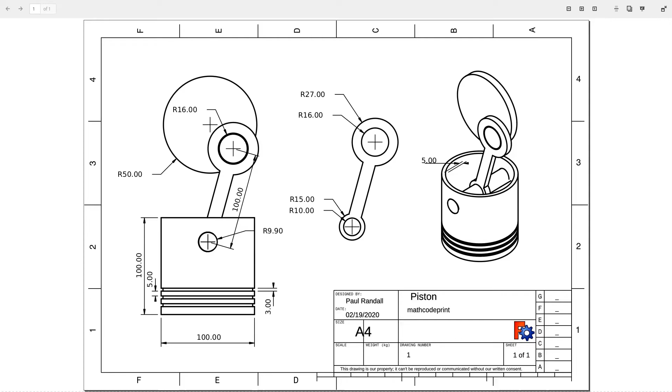And look at that. So to start, we'll do the piston, and I'll just do a body, and we'll use our additive cylinder. So our radius is going to be 50 millimeters, and one thing I like is to bring that right in the center and go to the corner like that.

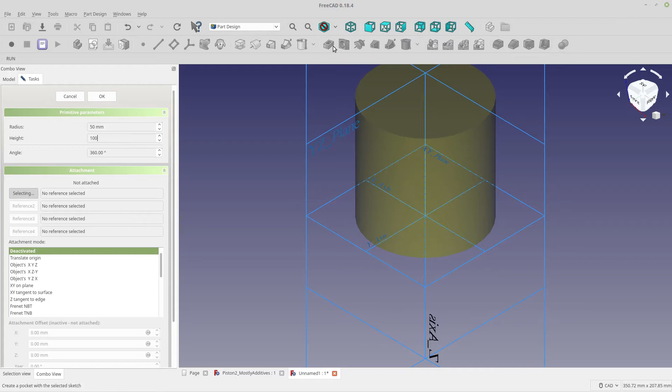So you can use this, or you can click right there. And let's make the height 100 millimeters. Get that back in, zoomed the way I like it. And we'll just leave that not attached because that's just going to be sitting out there.

And to hollow out the center, I'm going to select that top face, and we're going to make a thickness out of a solid, or a thick solid, or whatever it is. And we don't want it to be going outward because that would add thickness.

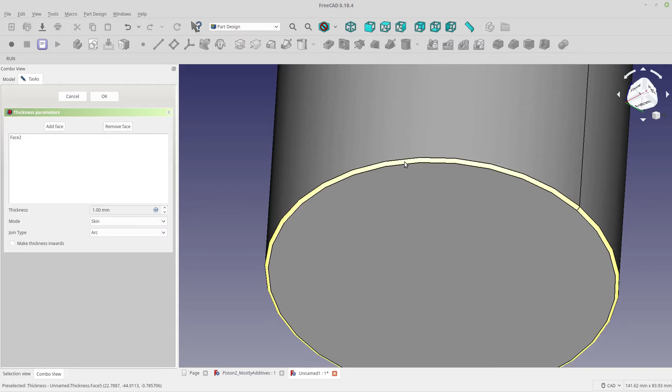And if you look, you can see that it adds a fillet, or a corner there, and I don't want that. I don't want it to be as if it was machined. So if we make it inward, that goes away, and it's the direction we want. Based on our drawing, we want it to be 5 millimeters, and we can click OK, and we're done.

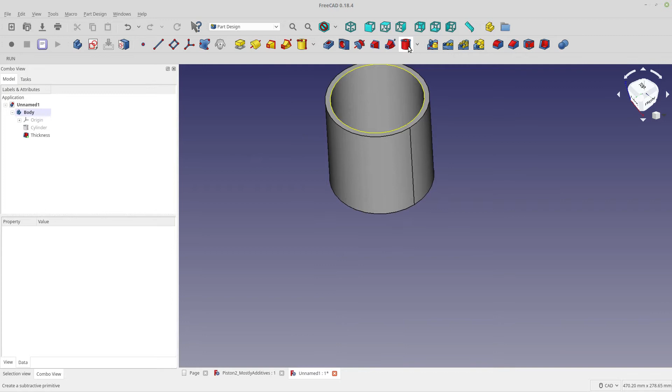So the next thing we want to subtract is where the wrist pin's going to go. So I'm going to start out with a cylinder, and again, I like to do this. So our radius is going to be 9.9, and that's just so that it looks like there's a clearance, but that would be a terrible clearance for that. And it's going to be 100 millimeters.

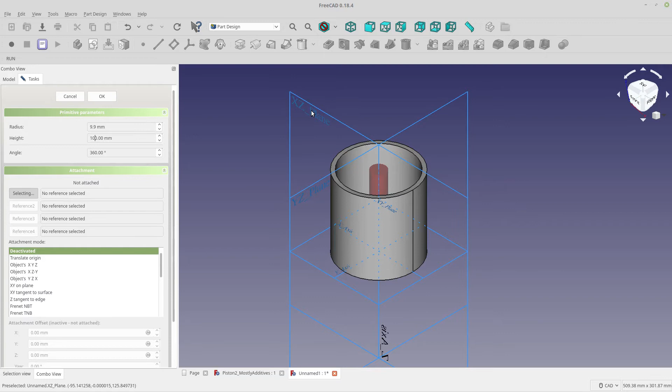So you'll notice that the attachment is already ready for selection for the first attachment. So I'm going to pick the XZ plane so that it's attached in that orientation. And then I'm going to offset it in the Y, because now our Z is pointing off of the XZ plane, so the local Z.

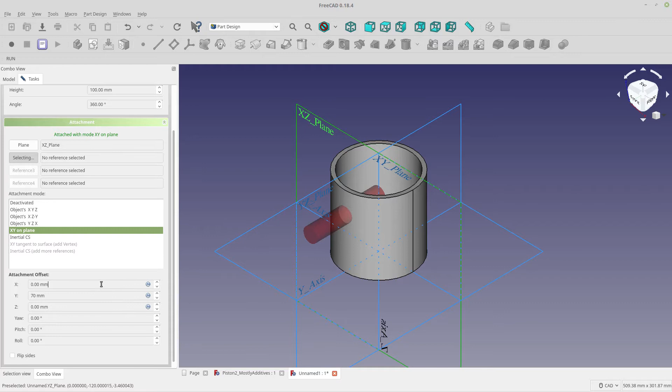So I'm going to move it in the Y direction, and that's just going to be up at 70, because that's what I picked for the wrist pin location for no particular reason. And then in the Z direction, I'm going to move it back 50, not 500, 50, so it's centered. And I wish there was an easy way to attach in the center of the object and not just on the origin. But anyway, there are ways to do it, but not easy in the way I would like.

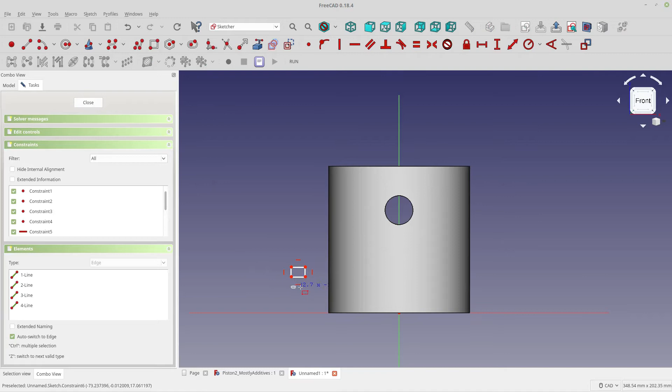The final thing is we're going to do the cutouts for the rings. So I'm going to do that with a sketch, and what we're going to do is we're going to draw three squares, and then we'll zoom up and we'll manipulate these. Oops, didn't mean to exit the sketch.

So what we'll do is I'll select these three sides, and we'll make those equal, and then we'll make the horizontals equal. And then I'll pick a corner vertex on these and give them a vertical constraint. So now they're all in line. And now let's set the size for this.

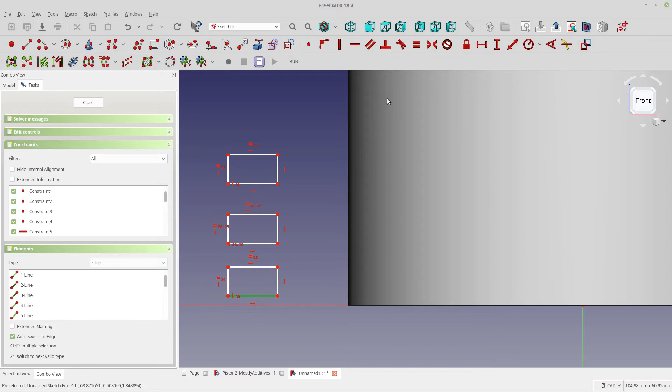And these are going to be, let's make these 3.5 millimeters deep. I don't know what they should be, but. And then each one's going to be 3 millimeters high. Actually, let's make them 5 millimeters deep. 3.5 sounds too small. As if I know. And then finally, we're gonna give them a gap between the rings of 8 millimeters.

So 5 is from my drawing, so we should use that. And I'll set this gap here to 8.

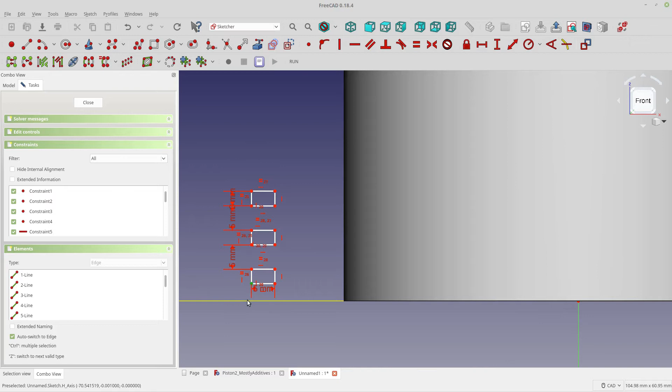And then finally, we're gonna set this. Oh no, sorry, these are 5 - wasn't thinking straight there. Because that's 3, 5, and then this is gonna be 8. Again, these are just numbers I picked out of my head because they don't really mean anything.

So now I'm going to slide this over closer, because sometimes if you do a measurement constraint, it pulls this line to the other side of the sketch, and I don't want that. So I'm going to get it close to where I want it so it doesn't have the chance to do that. And we're going to set that right at 50.

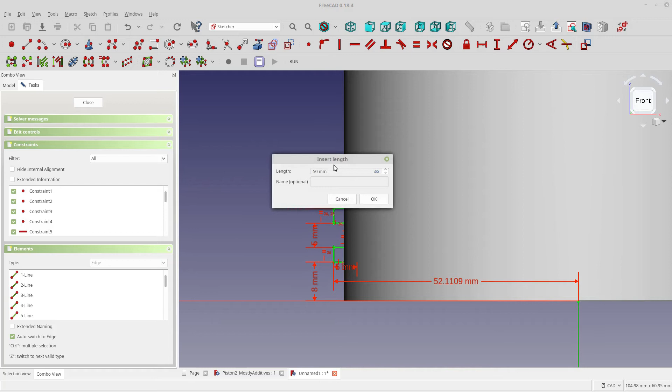So now that's a fully constrained sketch, and I'm going to revolve that with a groove, a subtractive groove - or so to revolve, so subtractive revolve, and they call it a groove. And that's, let's see, it shouldn't be reversed.

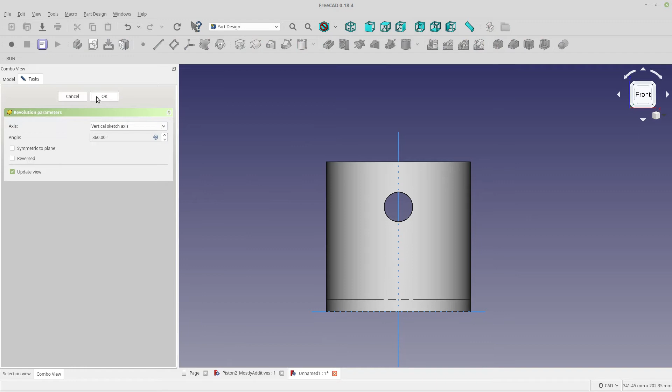And so we did something wrong because it shouldn't be getting rid of the whole thing. Let me see if I can figure out what I did wrong there. So our cylinder is 50 millimeters, and our sketch is - let's try making this 49 just to see what. Oh, let's look inside.

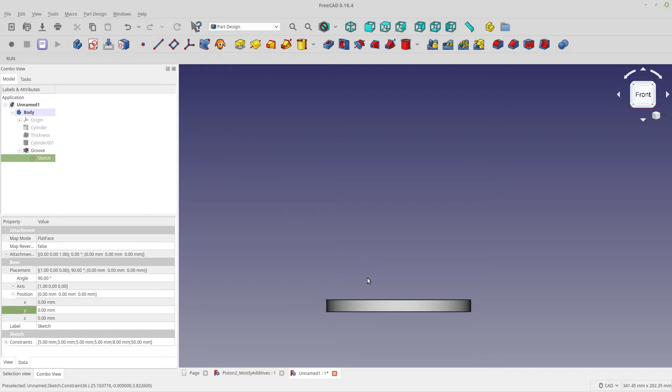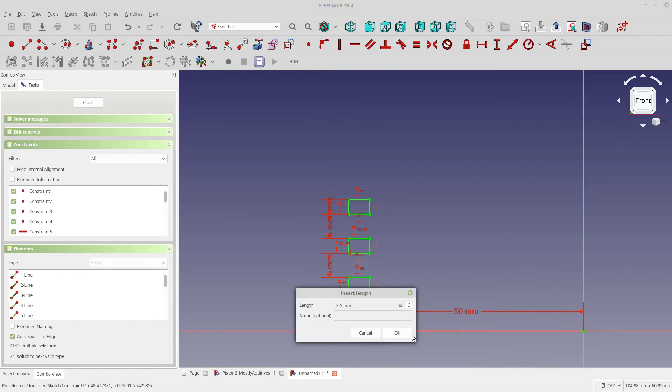Oh, I understand what I did. This is just basically removing the whole thing, and you can only have one contiguous solid, so it just basically chopped off the top. So let's make this 4. Oh, and I didn't actually have a measurement in the PDF yet, so we'll do that 3.5. Good, sorry about that. So now we have our grooves.

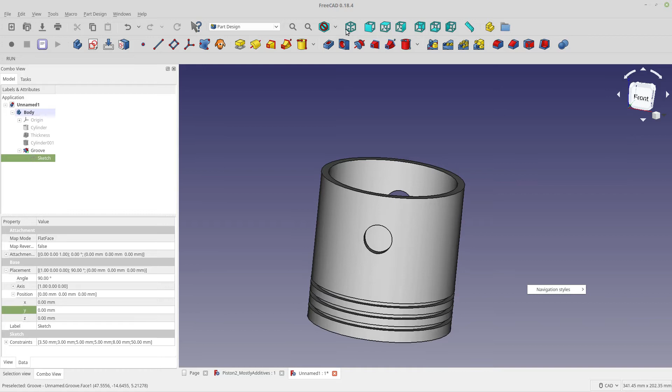So what was happening is the groove was as thick as the wall, so it was lopping off the top. In part design, you're designing one contiguous part. So because it cut all the way through, we had 1, 2, 3, 4 parts instead of 1, so it only wants one at a time. That's an important thing to remember for part design - it can be frustrating if you don't realize that.

So that's our piston. So let's name that our piston. And now let's create our wrist pin. This will be the easiest one.

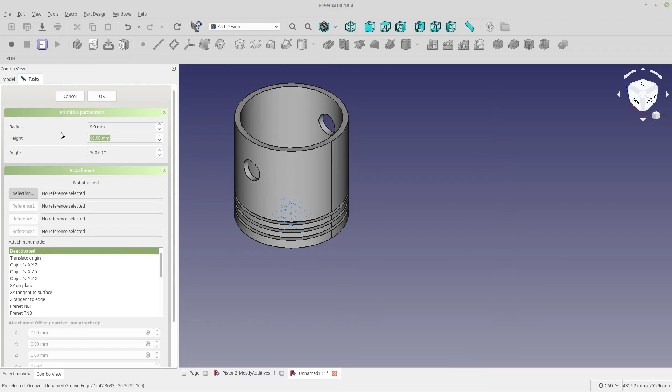So the wrist pin is just going to be a body with an additive cylinder, and it's going to be 9.9 because we want it a little bit tinier than the thing, but it would really be 9.95 or 96 or something - so that's a bogus tolerance. And again, we're going to pick the same thing to get it in the right position. Now, as this is just going to be a part, we're just going to leave it right there for now.

Let's call that wrist pin, because we're going to use draft clones to position it. And these are going to be parts, sort of our parts database. So let's do our reposition.

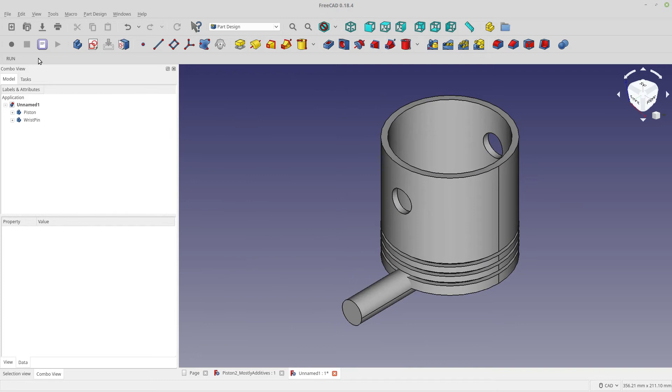Okay, so now let's do our crank rod - I think that's what you should call it. So this is going to be a sketch because to me that was the most straightforward way to make this. And this is just a real simple sort of thing, not official or anything like that. So I'm going to get rid of those for now. And it's going to be two.

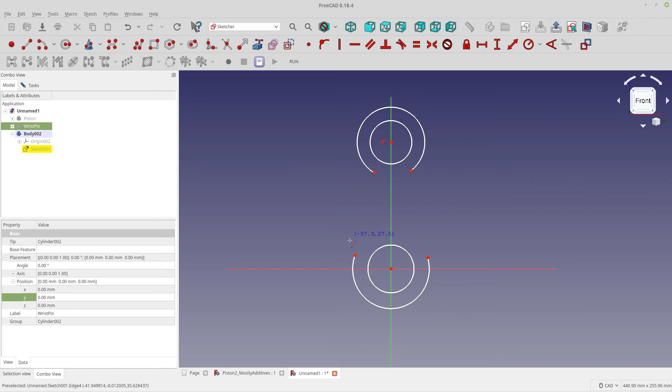These will be the openings for the rod, and then these will be the ends. So I'm going to be doing an arc segment here, one there and one there, and then these will be connected by lines, and we'll just give these vertical constraints to keep them in line with each other - one there and one there. And then to keep these basically constrained, if we give these horizontal constraints, it basically keeps that wall constrained. You don't have to do a symmetry constraint or anything like that.

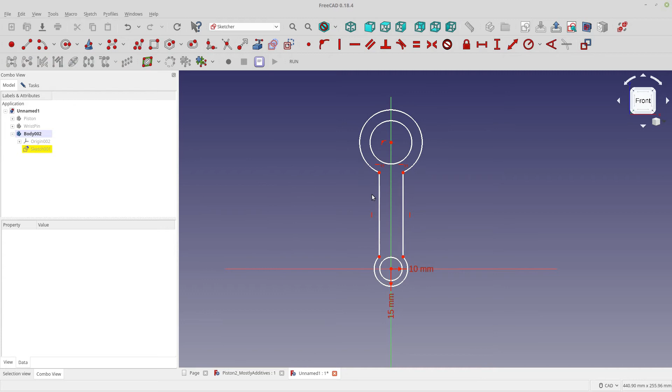So now let's give these the radiuses. So this is going to be, what's this one, 10, and then this one will be - let's see, that's going to be 15, and I just went on what it looked like is all, so I'm not basing this on anything real. So this is going to be 16, and this is going to be 27 - again, just what it looked like. So that's our basis, and all right.

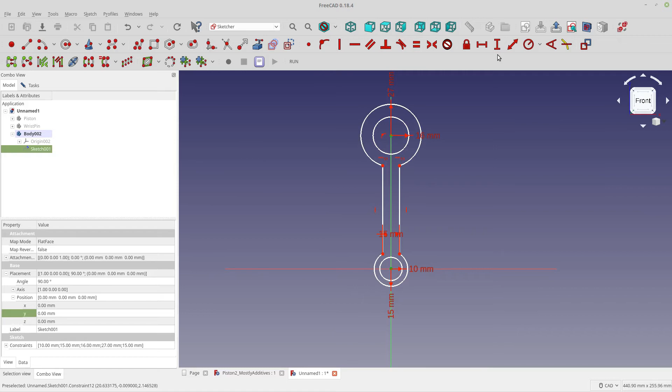So to get it fully constrained, we just need to add a distance for this one, and I think that was 15. Okay, so wait, not fully constrained. Oh yeah, one last thing - basically, we got to add the rod length, so that's pretty important. So that's going to be 100. And there we go, now we're fully constrained, so that means that nothing can move.

And let's close the sketch, and then we're just going to pad it. And we'll just leave it at 10, that's good. And we've got our rod - so good to go. Let's call this our rod, and then we'll be done.

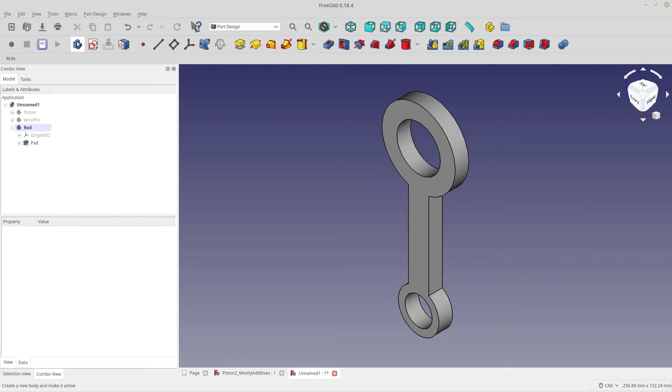And now let's do our crank. So we'll do a new body, and let's hide the rod, and we're just going to do yet another cylinder, and this will have a radius of 50.

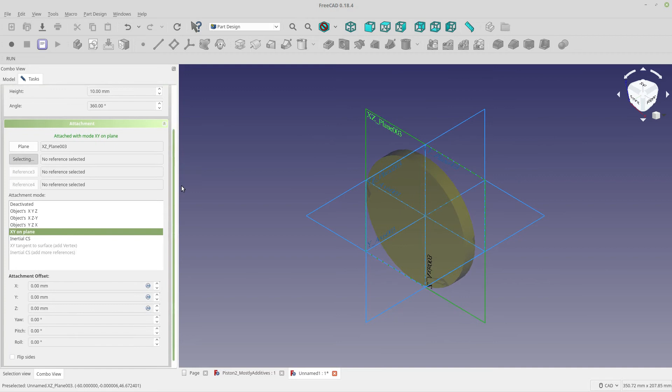And again, I'm going to bring that out, and it's going to have a height of 10, and we'll put it on the XZ plane. Now this one I'm going to have it go flip sides, and let's go to the right so you can see what happens. When I flip sides, it just goes to the other side of whatever you have it attached to.

That's good. Now we're going to add one more cylinder to it. That's going to be the crank, the cam lobe. So do cylinder, and the cam lobe is going to be 16. Again, we'll attach it here. And then it's going to have an offset of 35, I think. Let's try that. I thought that was on my thing.

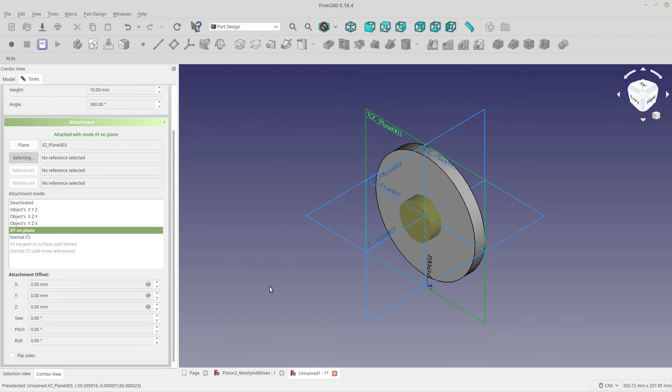So Z is coming out this direction now, local to the cylinder because we turned it. So I'm going to move it in the X direction, I think. Yep, 35, which you could do Y too, but 35 brings us right to the edge. So that's a reasonable cam for us, reasonable looking thing, and that's it for the crank lobe, crank and cam lobe or whatever.

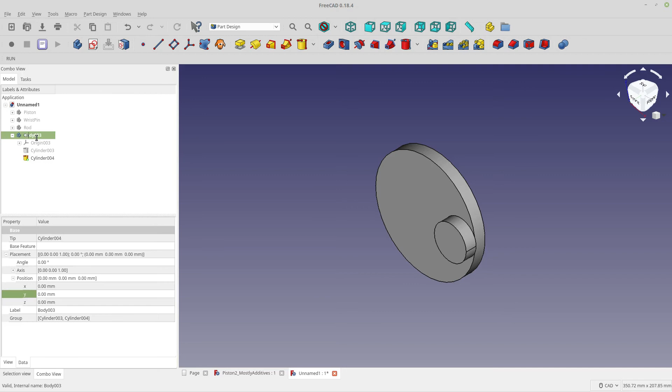So we have our four things. Let's call this cam. And as I mentioned before, this is sort of our part pile, often. So I'm going to make a folder here, and call it parts. Now I tried some of this with using the part container, but I couldn't get the result the way I liked. It made it a little bit too cumbersome for me. But you definitely should check this part container out. It's had some improvements, especially if you're in 0.19.

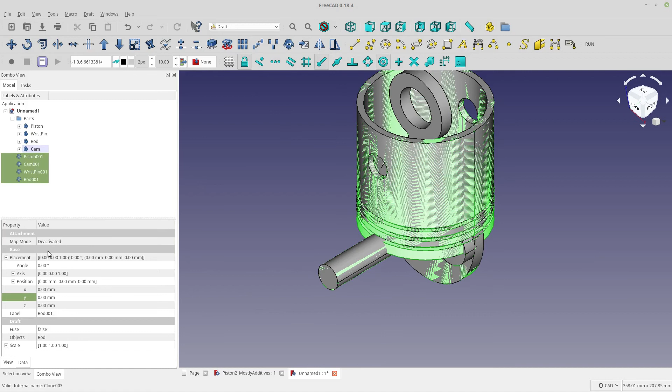It's gotten even better. So now what I'm going to do is create clones of these, but we're going to use the draft clone. The reason I'm using the draft clone is it has an attachment, so you can do map mode for a draft clone, where you can't do that for the part clone, as far as I know. So now I'm going to hide these. I had to hit that space twice, but you still see I have these.

And I'm going to make another folder. I'm going to call this assembly. And just put all of these in the assembly folder.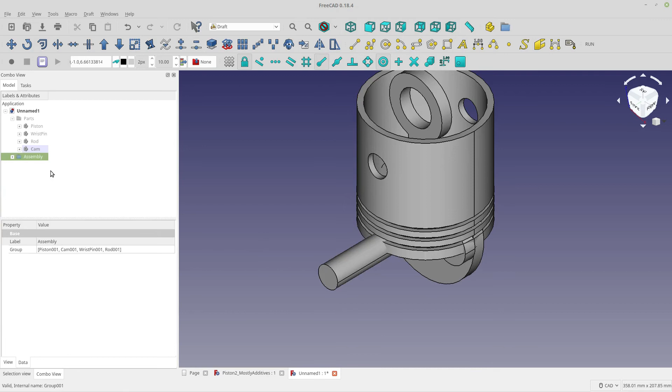Now to position these, I'm going to make a sketch. So let's hide this. And the first time through, to get it synced, you have to hit space like 3 times. So let's go to the front. But my sketch is going to be just in the Sketch Workbench. It's not going to be Part Design Workbench.

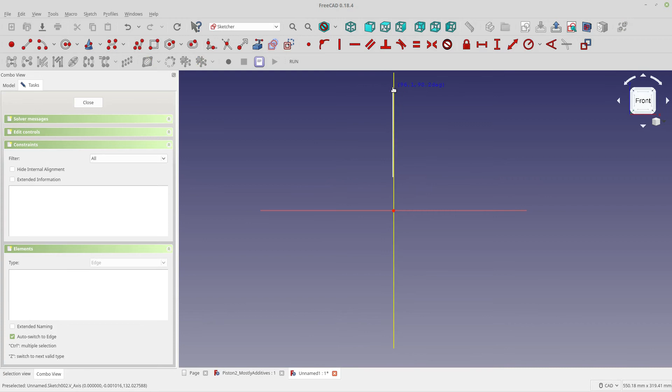So it's a free floating sketch, with nothing selected. I'm going to put it on the XZ plane because that's what we've been working on. Sorry, I choked a little bit there. And all I need is a triangle. So I'm going to use the polyline tool, and I'll leave these two points constrained to that center line, and get a fully connected triangle. I want to make sure of that so I don't get any funny results.

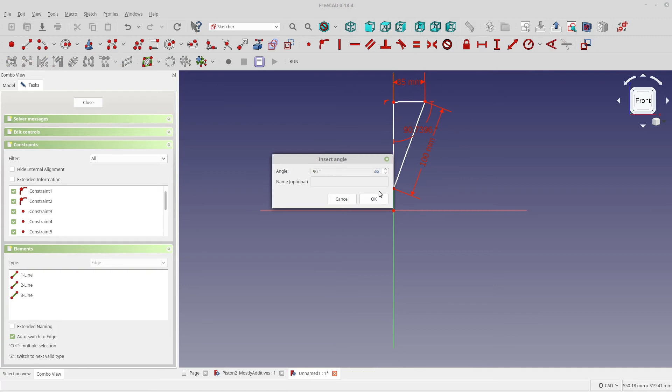And then I want to make this the rod length, so that's the same as the rod length. And this is going to be the same as the cam offset, which was 35 if you remember. I'm going to set this at 90 degrees so it's easy to work with—you can see how it wasn't. And then we're going to put our cam up at 170. So what's going to happen is this point of the sketch is going to be the center of our cam. So let's close that sketch and bring it into view.

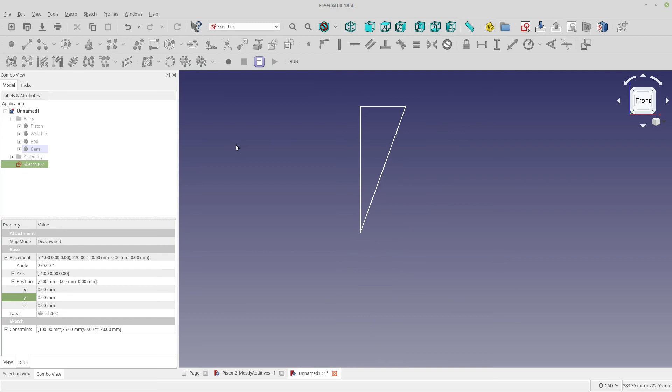Oops, this time I don't want that. Let's do front because I'm positioning. And let's show our assembly again. So I'm only going to work with one at a time, so I'm going to hide the rod, the piston, the wrist pin. We're going to move the cam up to this point first.

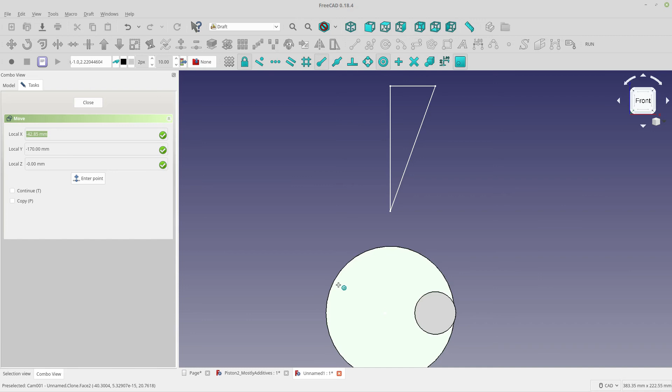So with it selected, you can either have the whole thing selected or just a face. I'm going to select move, and then make sure I get the center snap, the aqua circle with a dot in the middle. So I've got the center snapped, and the line indicates where I've snapped to. I'm going to select this line, and you'll see the endpoint snap icon there, and I'm good to go. So now it should be where I want it.

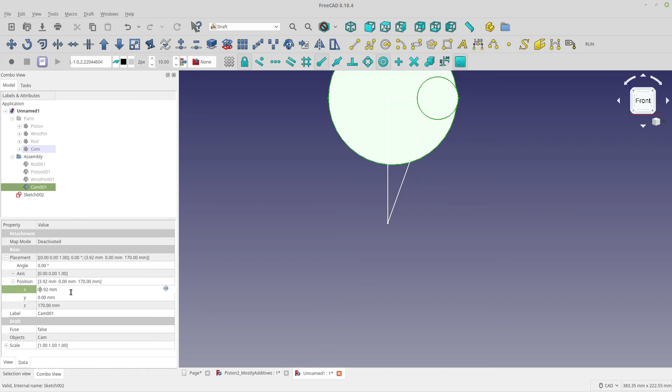I'm going to double check this, make sure it's not - so I've been getting this weird 3.92 offset. I don't know why, so let's get rid of that. Maybe it was there before I did it. So now that's correctly centered.

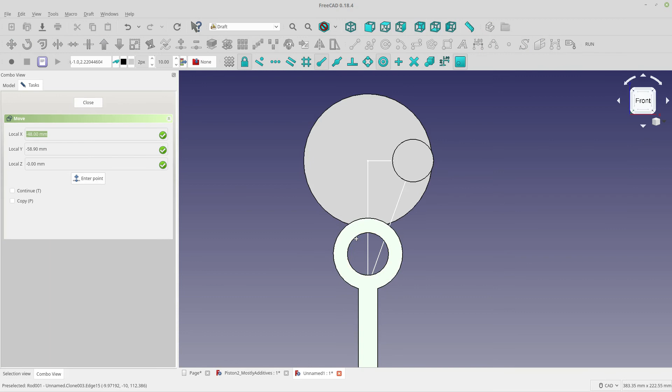And let's move the rod next. So let's bring the rod up, and I'll select the face there, and we'll do a move. You can get that center select with a couple of different ways. So for this one, I want that line, and we'll center it there, and that's good.

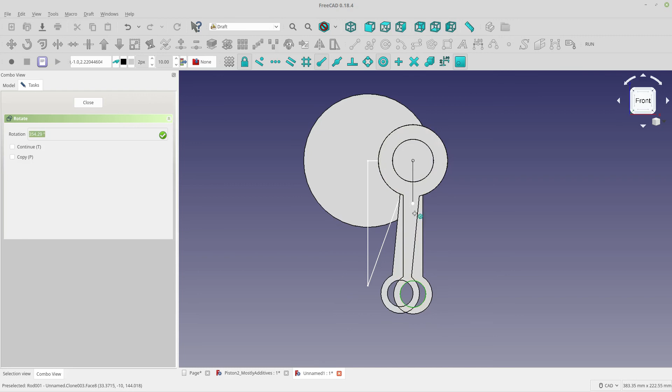Now I'm going to rotate this using the draft rotate tool, and we just want that white dot in the center. It doesn't matter because it's the center of rotation at this point. Let's pick - oops, I did that wrong. Let me escape out of that. Try it again. Rotate. Center of rotation is going to be there and there.

So now I can just rotate it to get to the end point, and you can see it's able to snap to that end point. So now one thing I can do to check is, I know that this rod from center to center is 100, so it should be 100 from there to there.

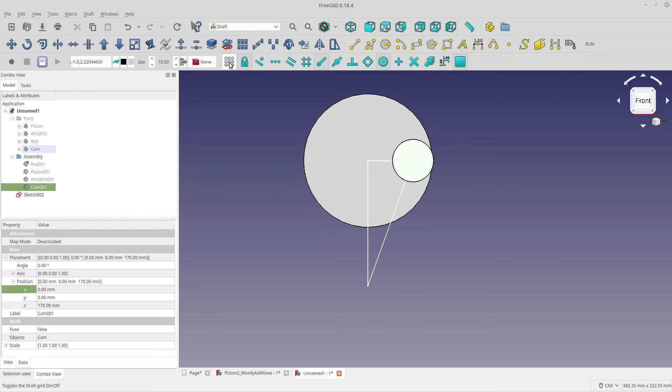To measure that, I want to get my draft plane back, and I want it to be on top of here. Let's just double check that. Yep, so I want to snap to the plane. Now I'm going to do a measurement, from the top of this to directly over that - so it's not going to be on the dot, it should be 100. And that's good. So now I know this is positioned correctly and my rod is positioned correctly.

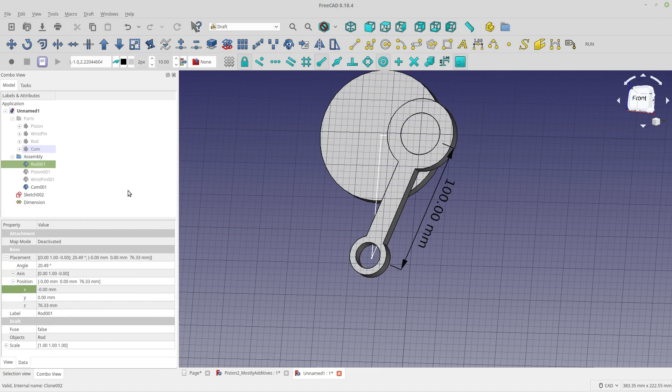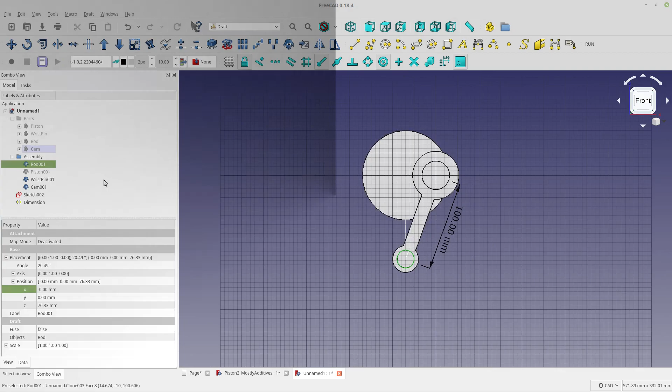Now let's see if I can move my wrist pin. So let's bring the wrist pin up, and let's do a move and center snap to center snap. It's not in its final position, but it's close. So we'll move the piston. So finally I want to move the piston here.

So I'm going to select the face, and one of the things about selecting just the face is you'll be able to see things a little bit better, especially if you select the face that you're not going to use for a snap selection later. So let me see if I can show you what I mean.

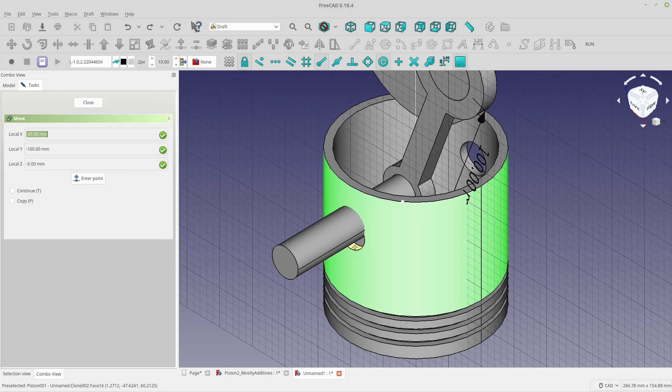So I want to get the center of this cylinder here. So you can see - yeah, so it's the center snap on the plane. You can see the white dot there. And I'm going to center it to here, and that's good. Because I have it snapped to plane, it didn't move any in the Z direction. It only moved in the XY direction. So my piston should be exactly where I need it.

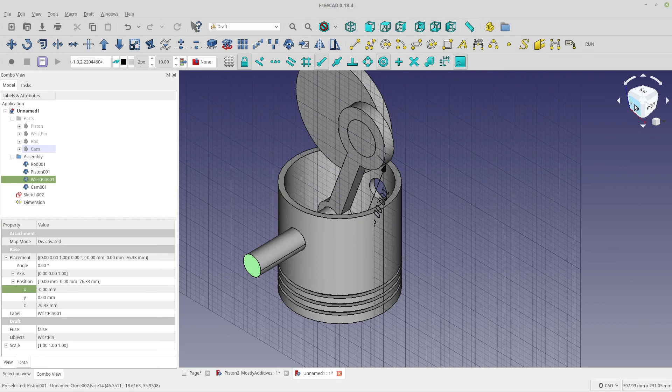Let's do that, and let's turn off the grid. It looks pretty good. Everything looks pretty well lined up. Sometimes you can check things by highlighting, and then - yep, I can't see any of that, so that's good.

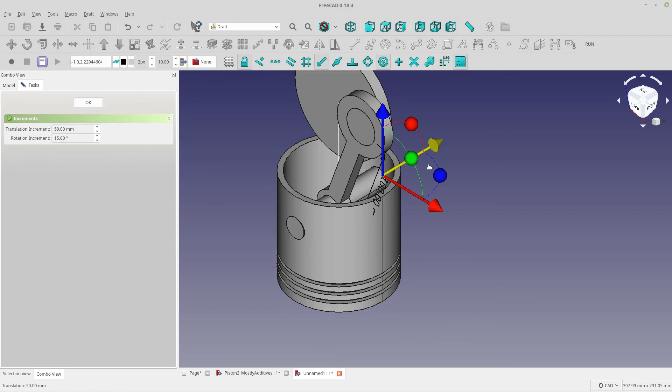So the only thing left to do is move my wrist pin in, and I should be able to do that just by transforming it 50. And yeah, so that's it. That's our piston in position.

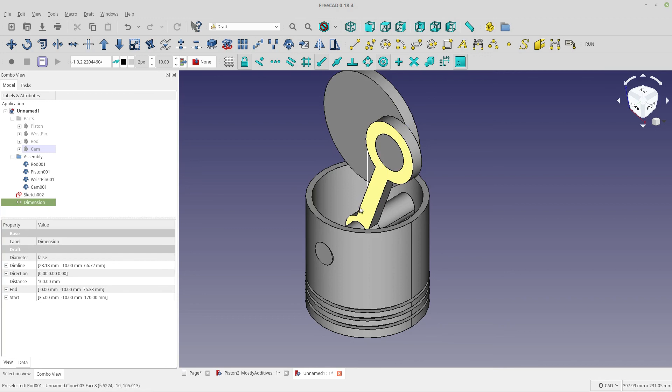So basically, however you set this sketch triangle, it makes it easy to position this rod against that triangle line, because the triangle is the same dimensions as the triangle set by the cam, rod, and throw, total throw relationship there.

And actually we could even go further to use that sketch to animate it, and maybe I'll do that in another video. Let me know in the comments if you'd like to see that, and thank you for watching.

Stay tuned for CAD battle, Tinkercad versus FreeCAD, and I'll tell you right away that FreeCAD will win because I'm partial. Have a nice day.